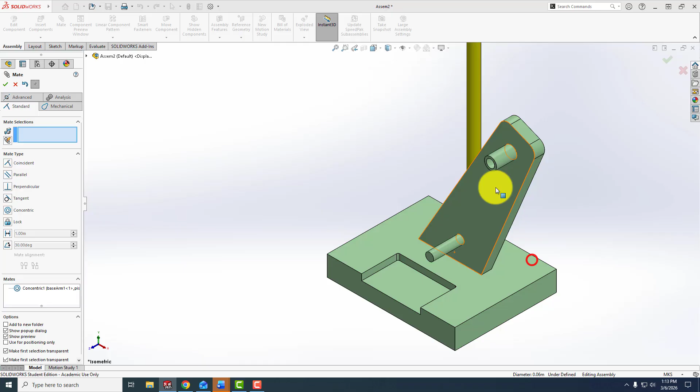Next I'll go back to Insert Component, browse to the part called Piston, select Open, and drop it here into the work area. Then I'll use my mate tool to set a concentric mate, zooming in to select the cylinder and any portion of that cylinder, say OK, and drag it into the right position. I'm not going to fully define this one yet.

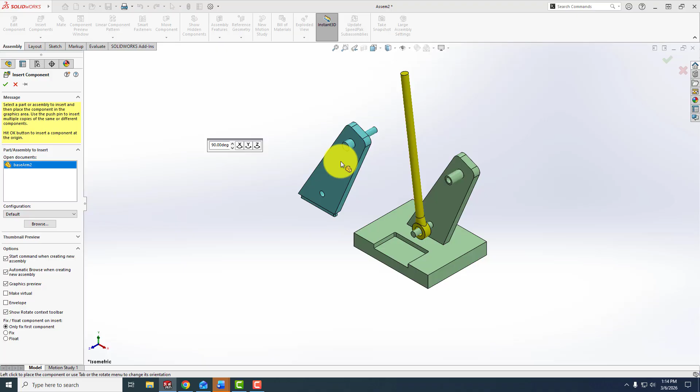That gets done in another step a little further on. So I'm going to say OK, and insert the other part, Base Arm 2. I'll select Open and drop the part here. I'm going to set this using 2 concentric mates and a coincident mate, though there are lots of different ways of doing this, so I'll select mate, select here and here.

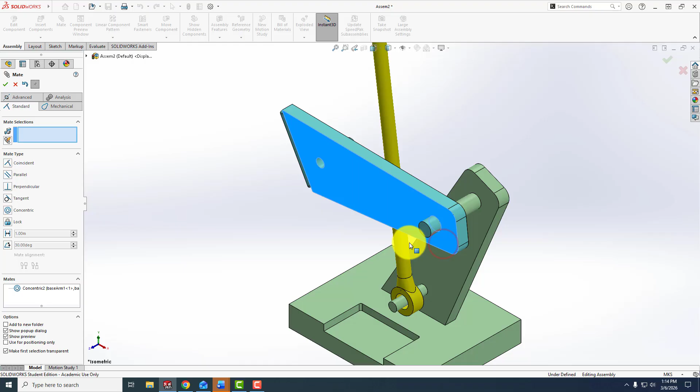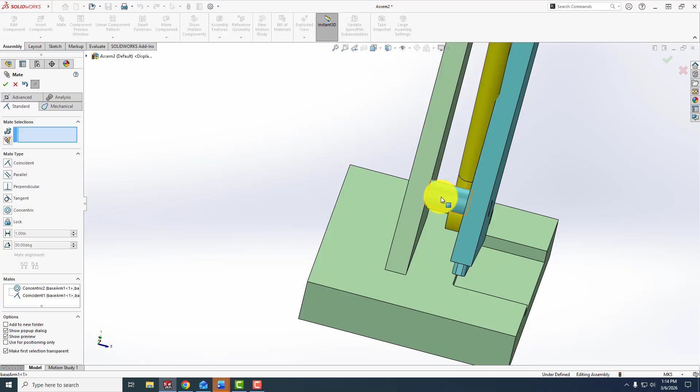Now I can go back and forth and rotate. To lock its position back and forth, I'll see it has this little tab here on the bottom. I'll select that and this face, which locks it, and then it can still rotate again. So I'll select this cylinder and this cylinder, and that puts them fully defined.

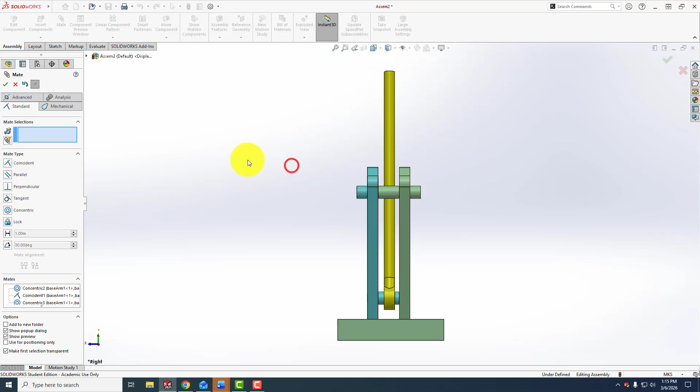You'll note that my assembly is still underdefined because the piston isn't locked down yet. We'll do that in the next step, or two steps later on.

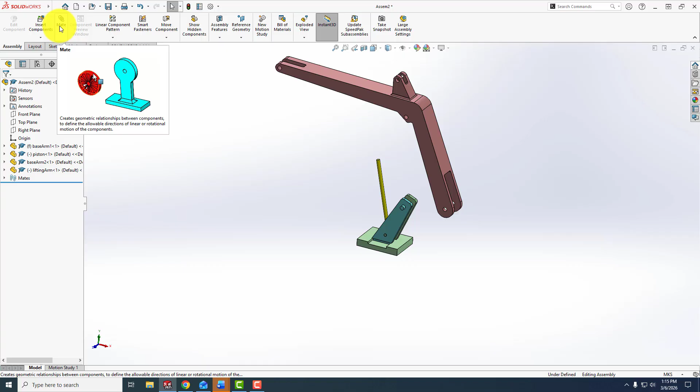Now I'm going to insert the lifting arm. This is the big part. I'll bring it in and just drop it, and again I'm going to utilize mates to define its position.

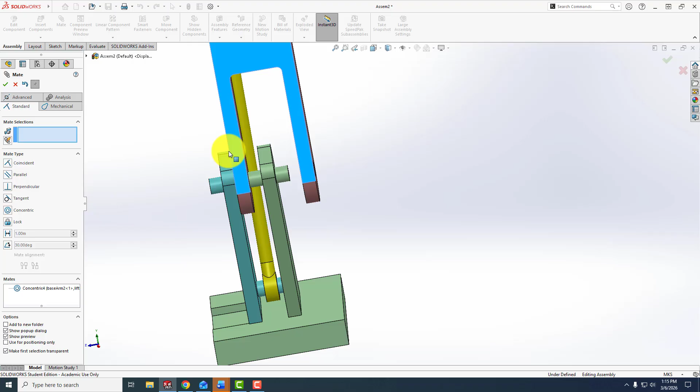I'll select this cylinder and this cylindrical knob on the base arm to lock its rotational position. Now it can still slide back and forth, so I can select this face and this face, make those coincident, and if I view it from the back, you can see it can't move back and forth, but if I look at it this way, it can move up and down.

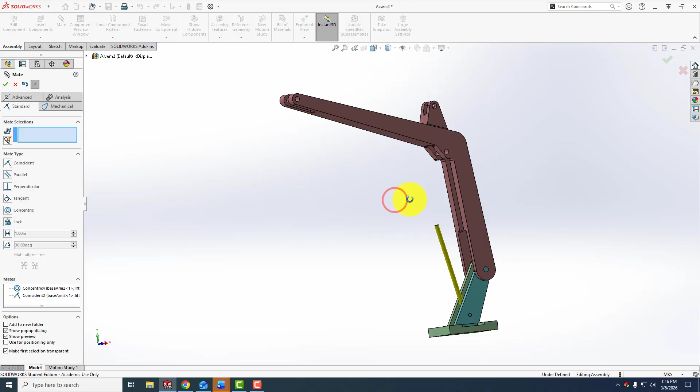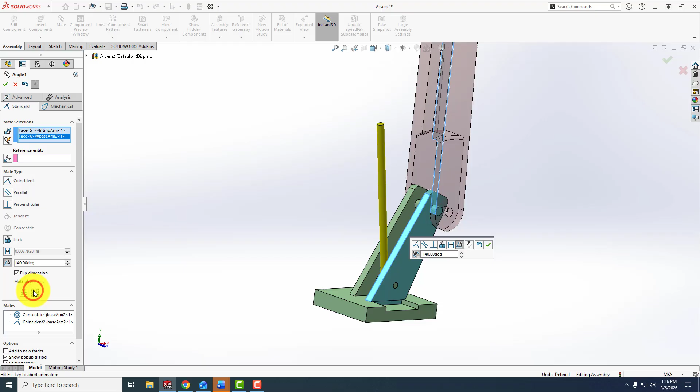So what I want to do is lock its angular position. I'm going to come over to the angle mate, put in 140 degrees, and select this face and this face. That's not what I wanted, so I'll flip the mate alignment, and that gives me the angle I'm looking for, 140 degrees. So I'll say OK.

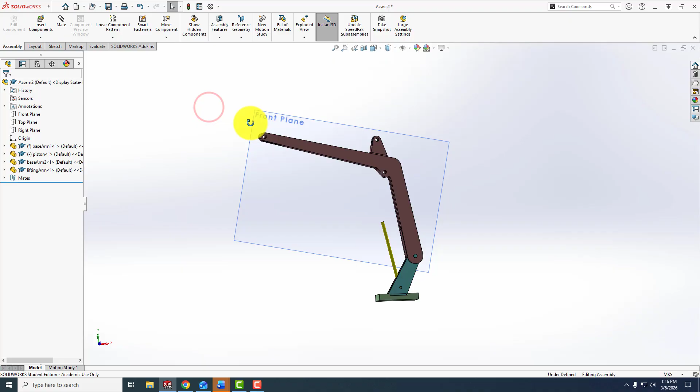Now what I'm going to do is turn on the visibility of planes. I'll come up here and turn that on, and you'll note that the front plane of this arm is visible. That's because, if you look at how the part was designed, its front plane has been set to be visible. You can do that when making a part if you think it'll be useful for positioning it within an assembly.

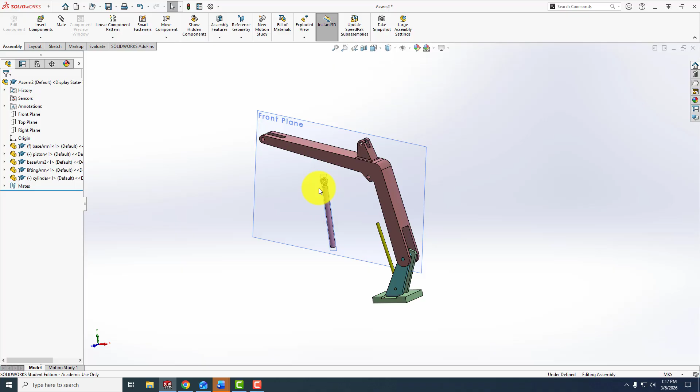The next thing I'm going to do is bring in the part called the cylinder. I'll click Open, and the first thing I want to do is rotate it around the z-axis twice, just to get it into the orientation I want. Now you'll note it also has a front plane that's visible, but you can see they're not aligned.

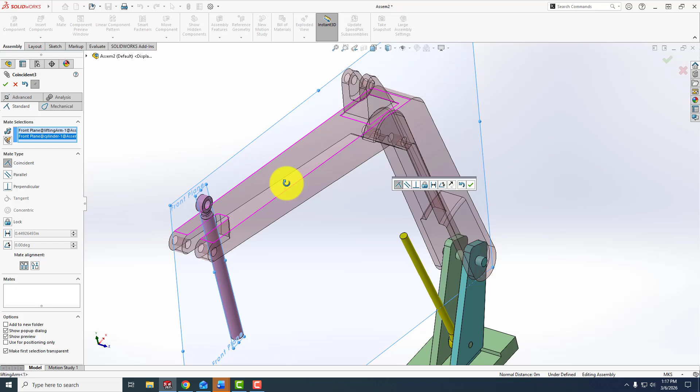So here I am going to mate the front plane of the lifting arm to the front plane of the cylinder, and that aligns those. Then I'm going to use a concentric mate, the central part of the cylinder to this cylinder here of the lifting arm, so that puts them together.

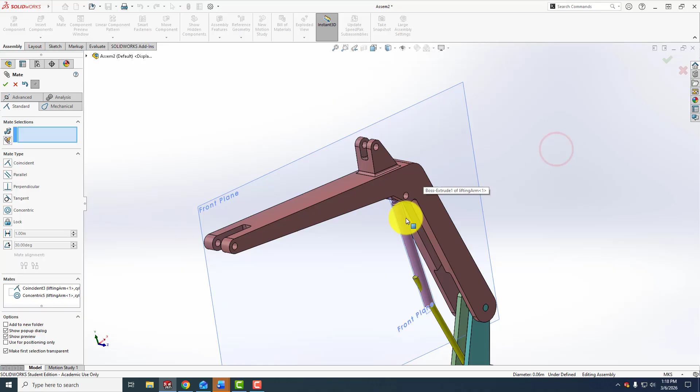The last thing I want to do is set the concentric mate between this part and this part, and SOLIDWORKS automatically aligns the parts and makes them concentric to each other. That has put all those together.

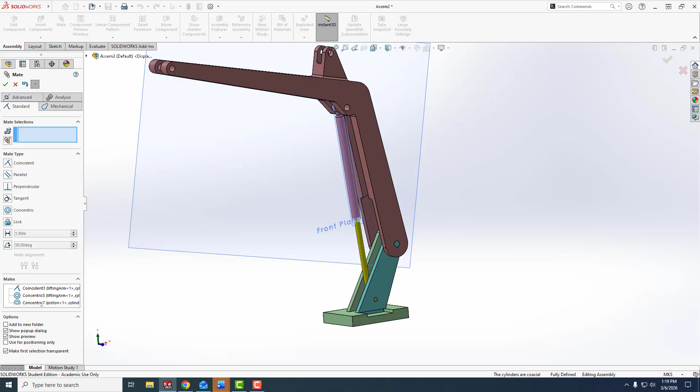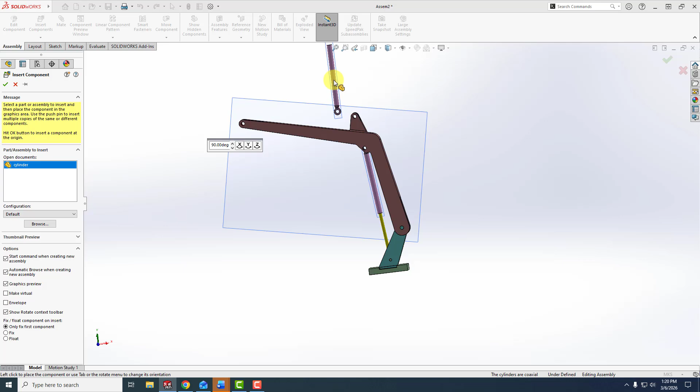Now the next thing I need to do is put another piston cylinder setup up top here. So I'll bring in the cylinder up here, go to the mate tool, select the two faces, the two front planes to line them up, and select their respective cylindrical faces to line those up. That allows this to move. I'll bring in a piston.

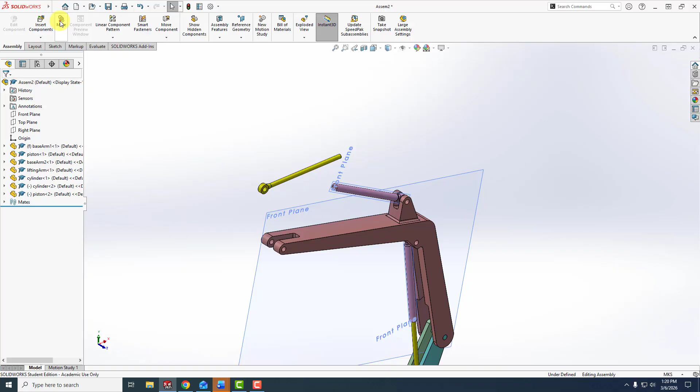I can bring it in here. Again, I can rotate it around the z-axis to get it approximately in the right position that I want. And I'll go to mate, and I'll select this cylinder and this cylinder and get those lined up.

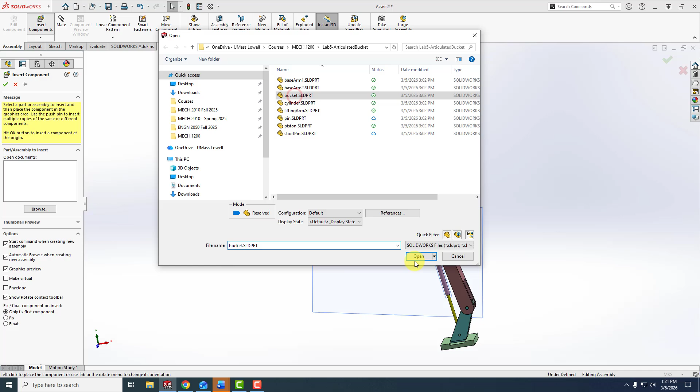All right, the last part that I'm going to bring in is going to be the bucket. So I'll insert the bucket. And this also has a front plane. So I will mate the front plane of the bucket to the front plane of the lifting arm, and that gets those all lined up. That's all I need the front plane visibilities for.

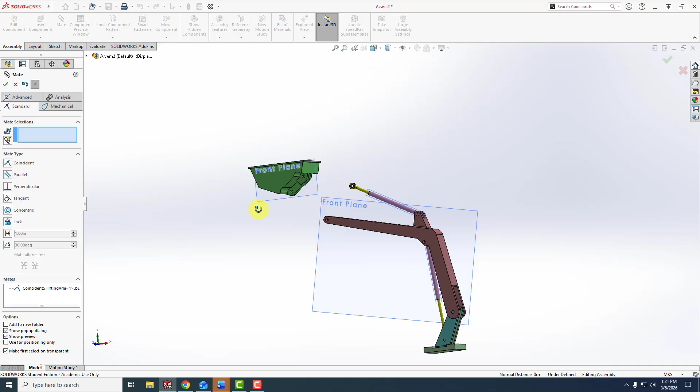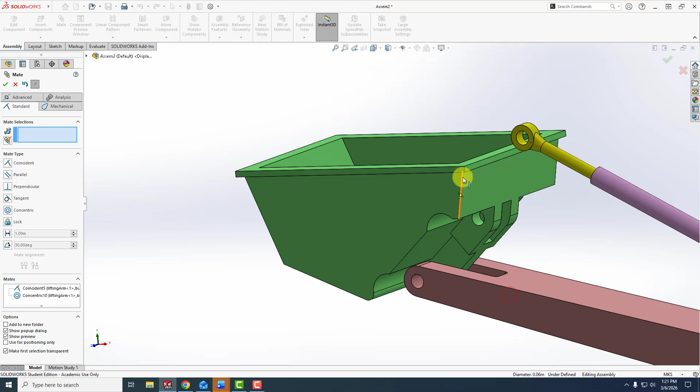So before I do anything else, I'm going to turn off the visibility of planes, clear up the view a little bit. Now I need two concentric mates. So I'll select this cylinder and this cylinder, and you'll see that the bucket now can rotate back and forth. I'll select this cylinder and this cylinder.

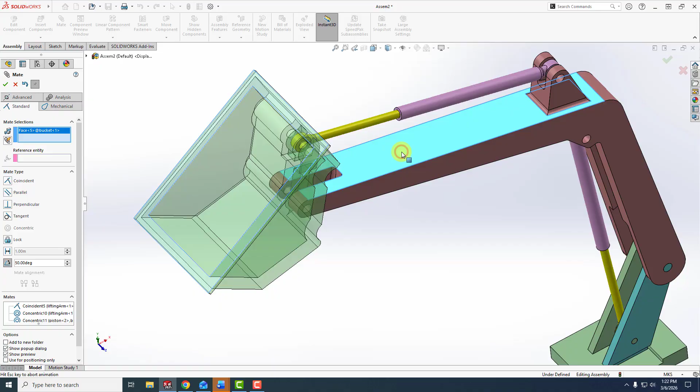All right, and if I view it from the right now, you can see that the bucket can still move back and forth. So I can set that by adding an angle, and what I'll do here is I'll set the angle mate to 50 degrees, and I'll set this plane and that plane, and if I view it from the front, I can verify. That is the angle that is shown in the document, so that's what I want.

All right, and then the last thing I want to do is we have the ability to put in our own coordinate systems. So say for whatever reason, you want to know what the center of mass is with respect to a certain location on this assembly. We can do that by, under the Assembly tab, going to Reference Geometry and choosing Coordinate System. Oh, before I do that, let me just turn on the visibility of coordinate systems first. So under the eyeball, I'm going to turn on coordinate systems.

And now I have the coordinate system tool open, and I'm going to select this point here to place the new coordinate system. You can check out the colors of the arrows, that by default it has the same orientation of the base coordinate system. That's actually what I want here, so I'll say OK. And you can see that there's a new element in the feature manager called coordinate system 1.

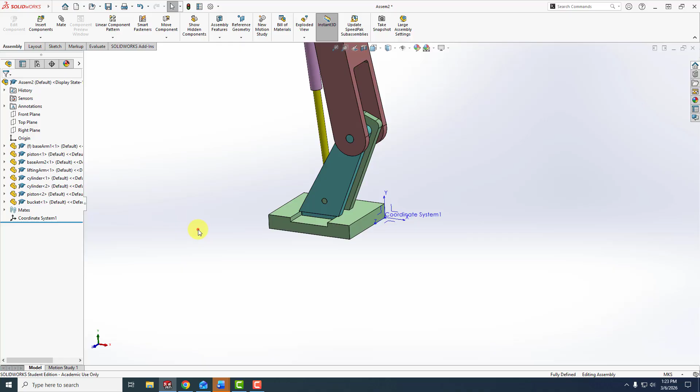All right, so now what I want to do is check out where my center of mass is. I'll click on the Evaluate tab, go to Mass Properties, and I want to report the coordinate values relative to the new coordinate system. And those are the values that are given in the lab document. So those are what we want.

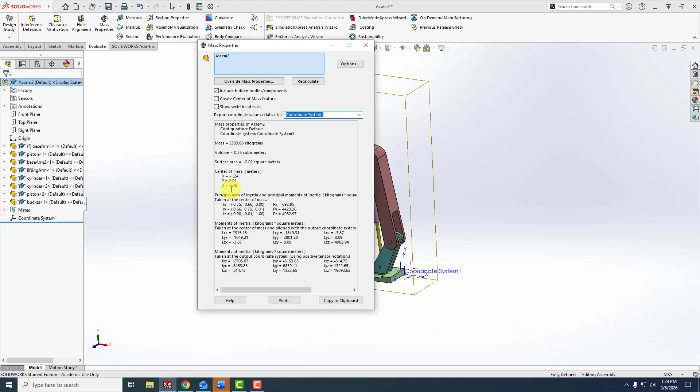All right, so now one other thing. I'm controlling the position of this assembly using essentially two angle mates. What I can do here, if I open up the mate folder, is I can left click on the first angle mate, and the option is to suppress it. And I can do the same thing on the second angle mate. So when I do that now, you can see that now I have these 2 degrees of freedom left. So what I'm going to do is control these now using distance mates.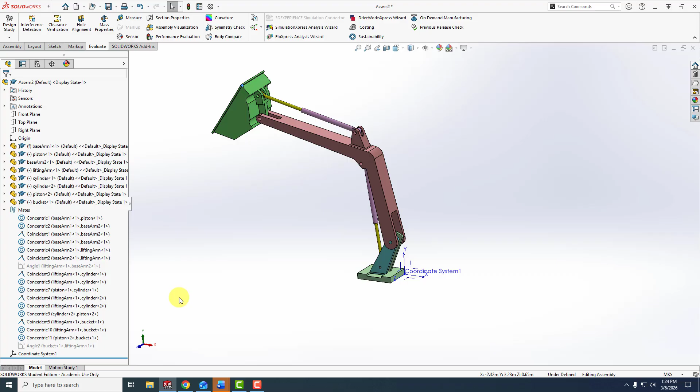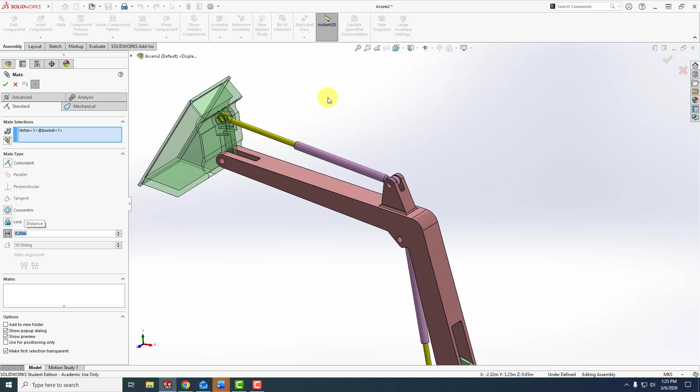So I'm going to go into the assembly toolbar, select mate, and I'm going to click into the distance mate. I'm going to put in a distance of 0.2, and I want that to be between the cylinder and the piston, but I can't see the piston inside here. Oh, I should have done that first, let me cancel this. I should have made it transparent first.

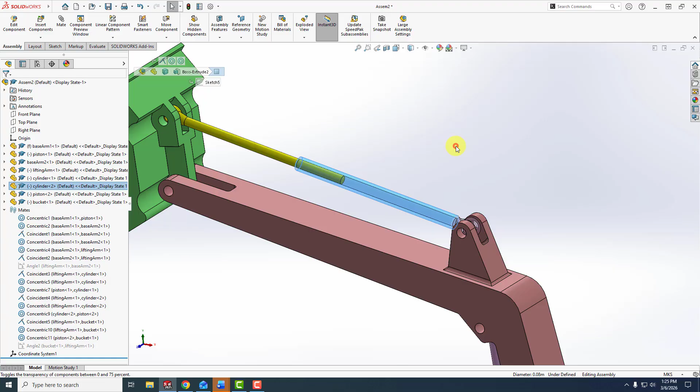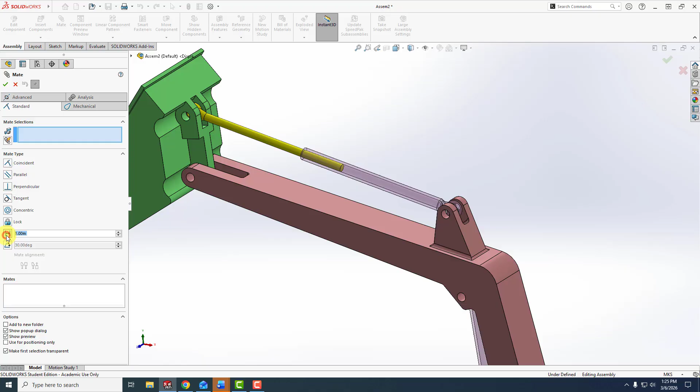So I'm going to left click, and from the options here I want to change the transparency of that cylinder. I'll do the same thing here, left click on the cylinder and choose the change transparency option. So now they're both transparent so I can see them. I'll go back to the mate tool. In this case I'll set my distance to 0.2, and I'm going to select the face of the cylinder and the face of the piston, and the distance will be 0.2.

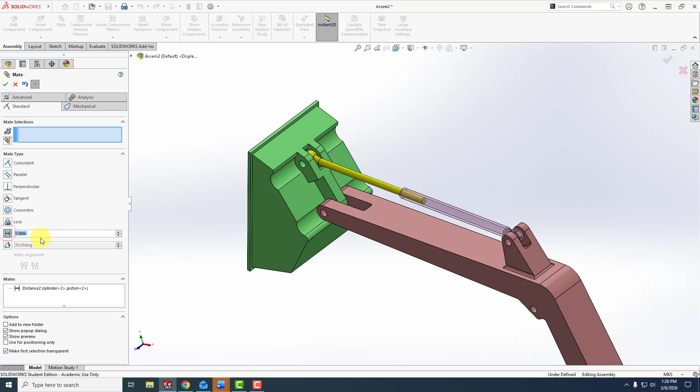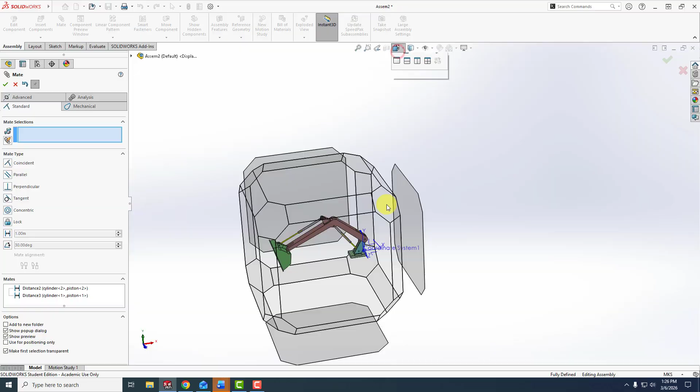And for the other one, I want to set the distance to be 0.6, and I'll come in here, select this face and that face, and set the distance to be 0.6 meters. I can view it from the front and verify that that looks like the diagram in the lab document. I can also verify the center of mass as being what's provided in the lab document.

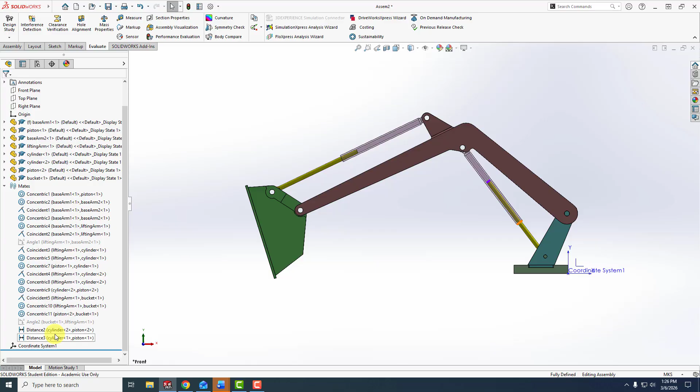Okay, and now the last thing that you want to do for exercise 1A and 1B is you need to change these angle and distance mates. So I'm going to suppress these 2 distance mates. So now I can turn my angle mates back on. And where's the other one? Here. Sorry, I didn't want to edit it. I want to unsuppress it.

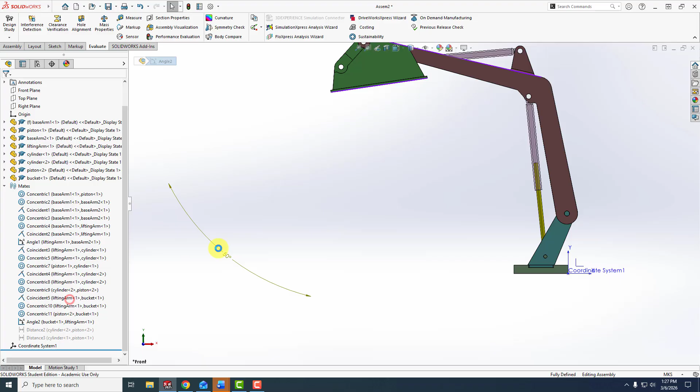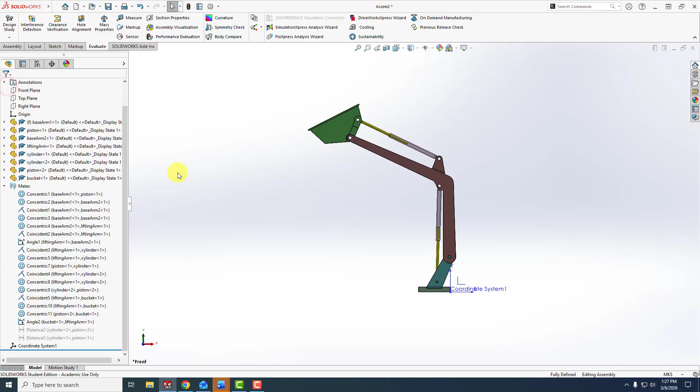And now I can go ahead and edit the mate. So if I want to edit this, changing from 140, I think the first option is 160. I can do that. And I can go ahead and change the other mates as I need. And then for the second part, you will again suppress the angle mates, unsuppress the distance mates, and put in what you need. All right, so that's how you're going to do this one.

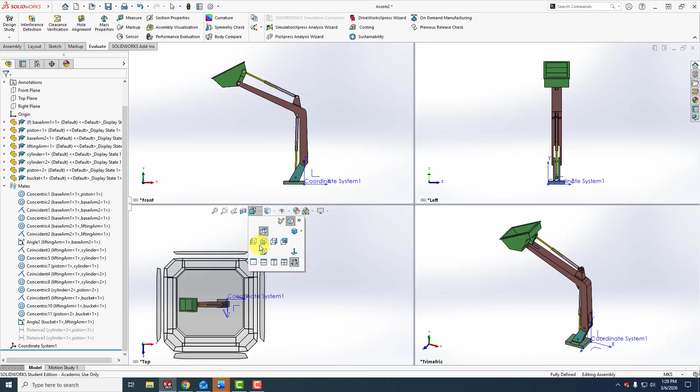And then finally, you're going to do a 4-view representation. So don't forget how to do that. And you'll select the front, top, right, and isometric views. All right.